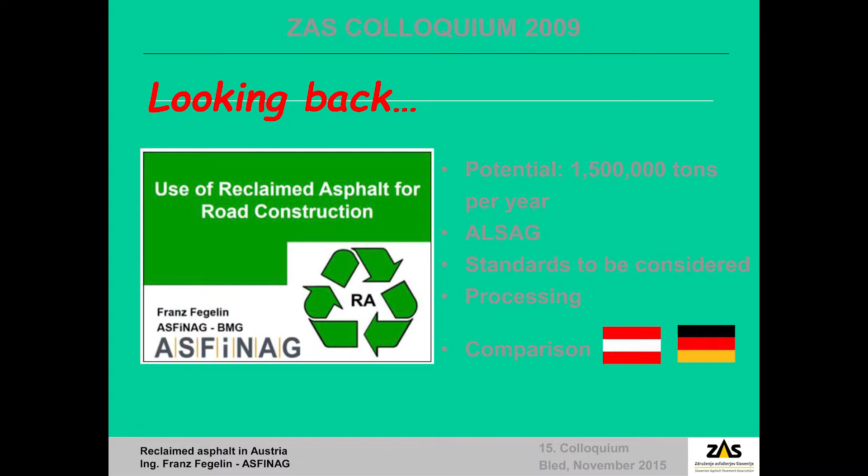What was the situation? In Austria we had in 2009 a potential of about 1.5 million tons of asphalt. If we extrapolate from an estimated 3.5% of bitumen obtainable from recyclable material, and at that time a common price of 450 euro per ton, we would have a potential saving amounting to 24 million euro per year. In addition, in Austria we also have a tax, called Alsag, that had to be paid for depositing material in a landfill. This tax is about 9 euro per ton.

Before 2009, the Austrian standards and regulations only allowed a maximum percentage of up to 10% to be used, and only for lower load classes, so we couldn't use it on the high-speed roadway network. Moreover, the construction companies, and also we as the clients, had only very little experience, so most of us were very skeptical. At the same time, some countries with fewer material resources, such as the Netherlands or the northern part of Germany, were already producing asphalt mix containing high percentages of reclaimed asphalt, reaching 80%.

But over the last 6 years, many things have changed for the better. The standards have been properly adapted, and also the quality of bitumen and gravels. Several pilot projects have been carried out. The one done by Asfinag in Graz was trendsetting in Austria. On the basis of what was learned, both the service items and also the requirements have been developed. The market started to optimize the processing technology.

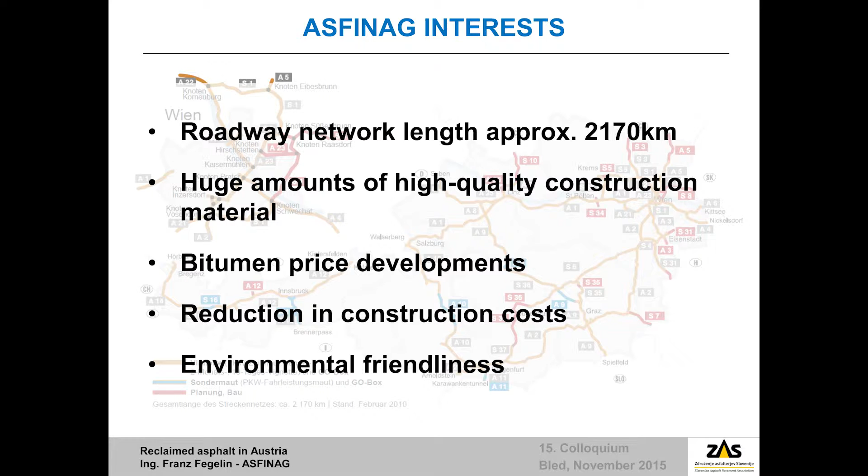The reason why we as Asfinag were so interested in the use of reclaimed asphalt is very easy to explain. This graphic shows our entire roadway network. The total length is about 2,200 kilometers, so we have a huge amount of construction material that can be reused. Bitumen prices are generally tending to increase rather than to fall. For this reason, potential savings are fairly significant, and we also have environmental benefits.

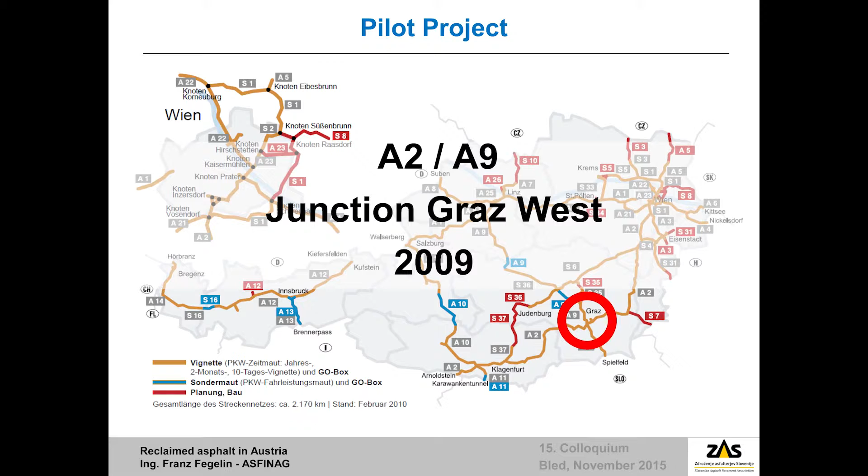As mentioned earlier, it was an Asfinag pilot project that gave direction to the development of the reuse of reclaimed asphalt for asphalt mixes. The project was carried out in 2009 in the area around Graz, in Styria, Austria. The section is part of the high traffic junction of the A9 and the A2.

On the overview map, you can see both ramps which were refurbished. Ramp G, you see it here in red, was made using traditional asphalt mix, so without reclaimed asphalt. Ramp E, which is marked here in yellow, was divided into 2 sections. One was made using 15% reclaimed asphalt for the binder courses and 20% for the base courses, and the other half was made using higher percentages, 20% in the binder courses and 30% in the base courses.

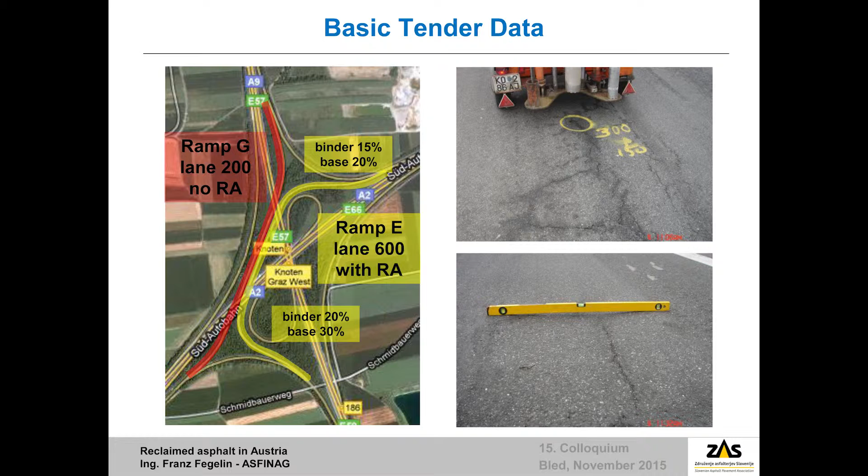In preparing the tender documents, preliminary research had to be carried out in order to know more about the required quality, because in this case we wanted to reuse the material from the same site. The evaluation of the tested sample cores showed which layers were usable and which not. The usability mainly depended on the quality of both the bitumen and stone, and especially on the percentage of round grain, which is very specific to the area in Styria and is not allowed in the Austrian standards.

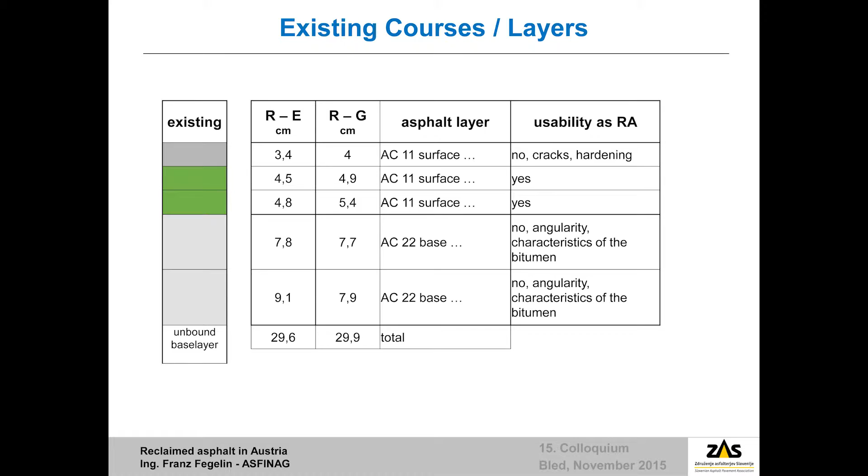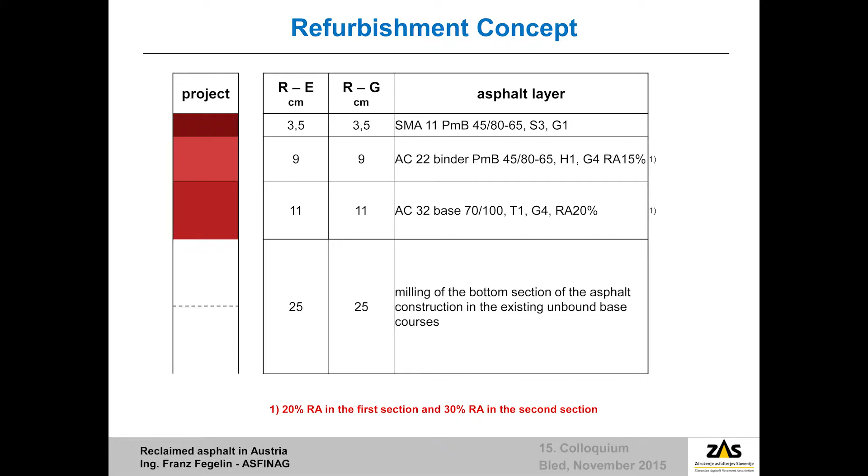As you can see, these ramps have been refurbished more than once, so we really had enough material to be reused. The layering design of the ramps was planned as shown in this table. To get the material, we milled layer by layer. The rest of the material we didn't need was processed and included into the unbound base courses in order to improve the quality.

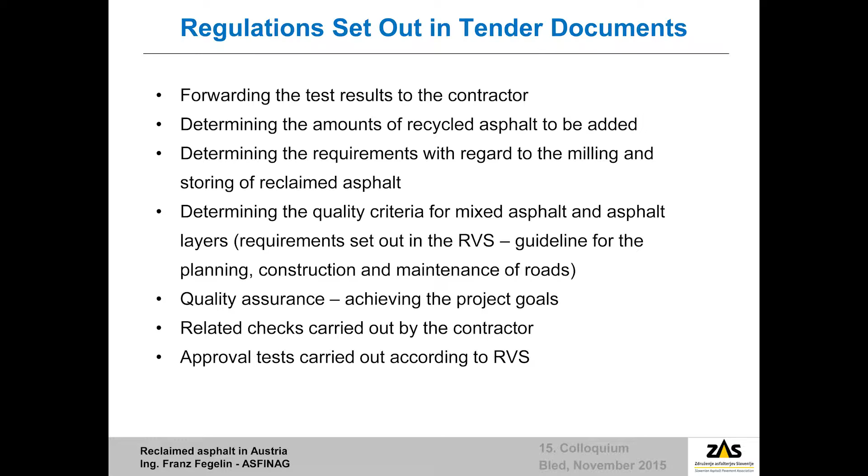Our next issue was which requirements and regulations were necessary for preparing our tender documents. First, all test results gained from the taking of sample cores were forwarded to the contractor, so it was possible to prepare the recipe for the asphalt mix and calculate the related costs. We regulated the amount of material to be reclaimed and the amount to be added, as well as the storage conditions. We fixed the project goals, the related checks, and set the quality criteria. Last but not least, we described the approval tests.

One important point to be determined in the tender document was the amount of recycling asphalt to be added, the related deviation allowed, and how we regulate the penalty payments. The deviation was determined by the conditions of processing technology. The check of the amount was done by batch scales, which were included in the conveyor belts. As we had higher costs for this pilot project, we couldn't risk ending up without findings for future projects. So that's why, in this case, our penalty payments were very high.

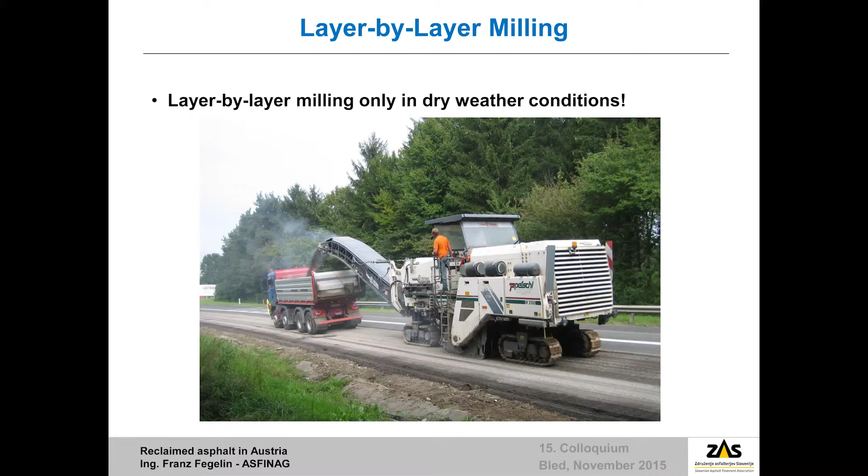As I told before, the first step is milling the raw material layer by layer as dry as possible. The depositing has to be carried out in such a way that each layer can be stored under covering in order to keep the water content as low as possible. Using this method, we got a water content not exceeding 3 to 5%, which is necessary for a good quality and also for the process in a mixing plant. Because with too high a water content, you would risk damages in the facilities because of explosions by steam.

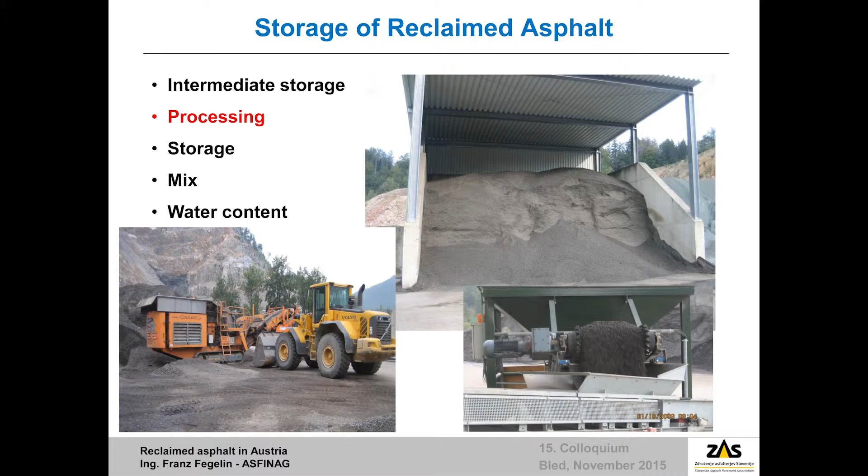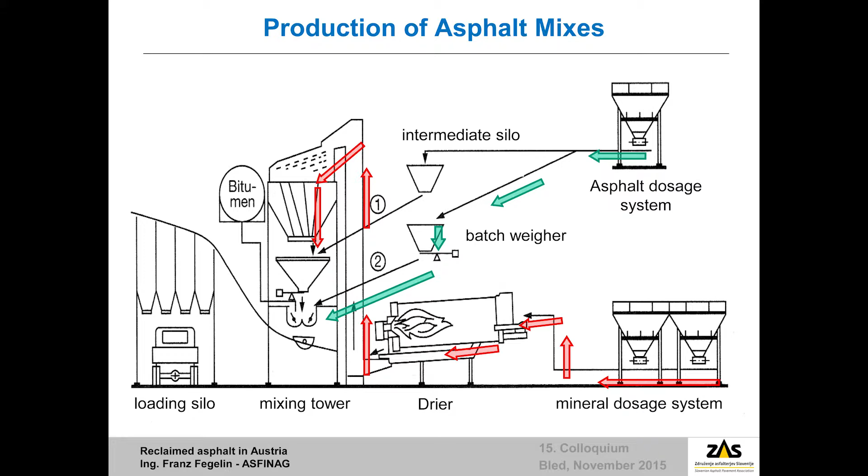In Austria, traditional mixing plants are set up with a combined system through which the asphalt mix aggregates are added. Mixing plants with parallel drums are rarely available. I think we have 3 at the moment in Austria. As there have been initiatives in order to promote the use of reclaimed asphalt, many facilities have been especially adapted for this purpose in the last 6 years.

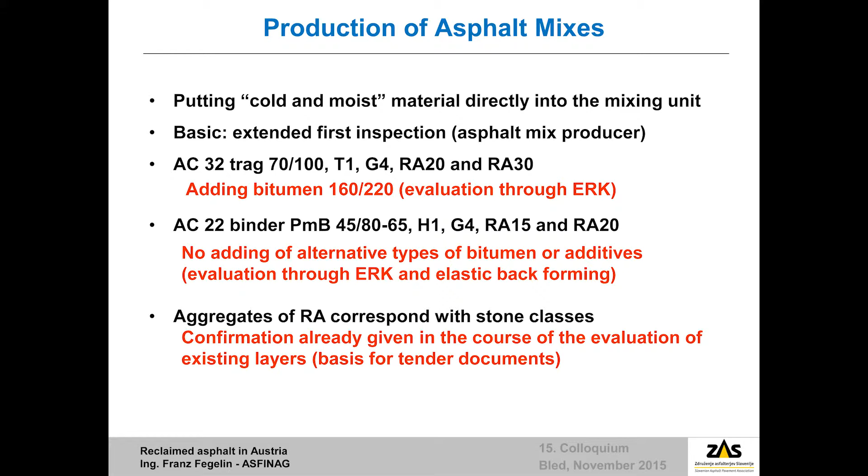The pilot project was adapted to the conditions set by the mixing facilities available in Austria. So we use material in a cold and moist condition. This regulation allowed for a large number of bidders to submit their offers. The first inspection was carried out by the producer. So the contractor chose, for reaching the quality in the base course, a soft bitumen. In the binder course, we didn't need any alternative types of bitumen or additives. The aggregate quality had been tested already in the course of the condition assessment, confirming its compliance with the set requirements.

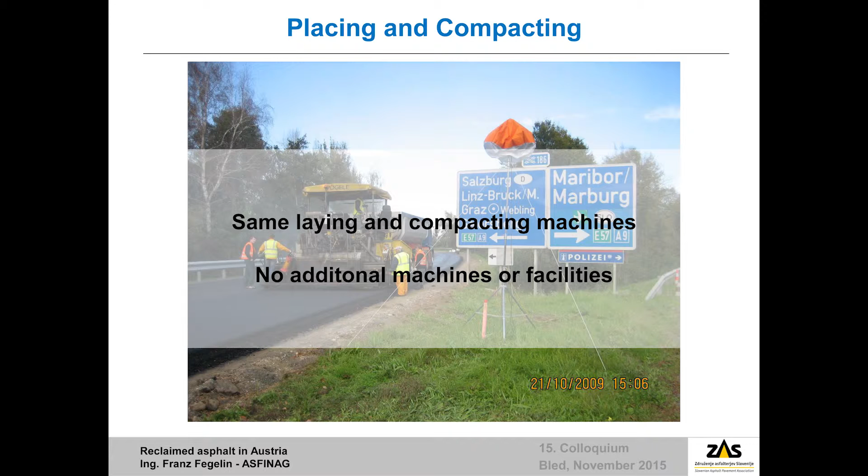For placing and compacting, there are no differences between material with or without reclaimed asphalt. As for the compacting, our personnel manning the machines reported that the time for carrying out the compacting was a little bit shorter in this case than with normal asphalt mix. This was confirmed by means of measurements carried out on the site.

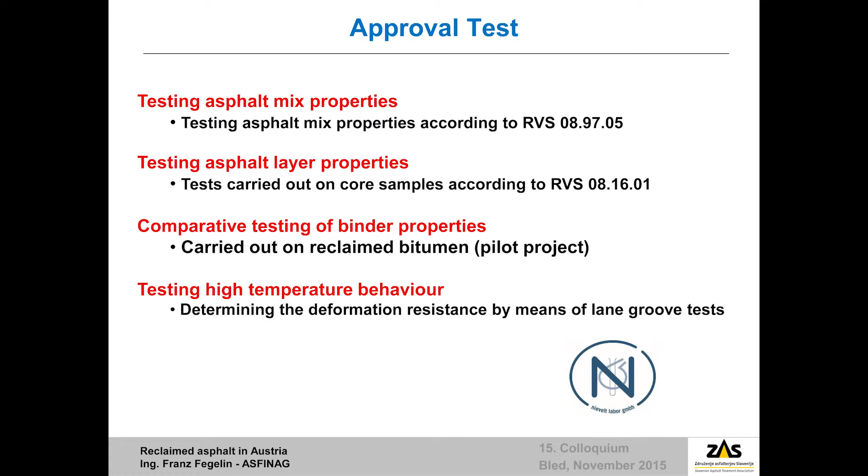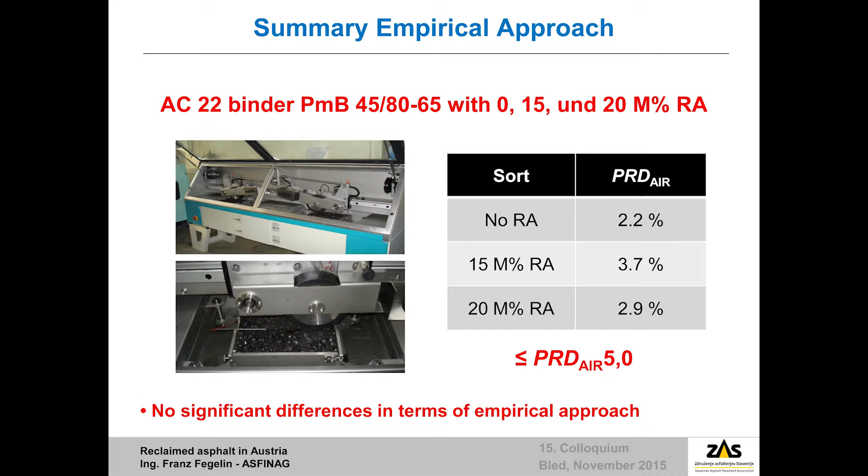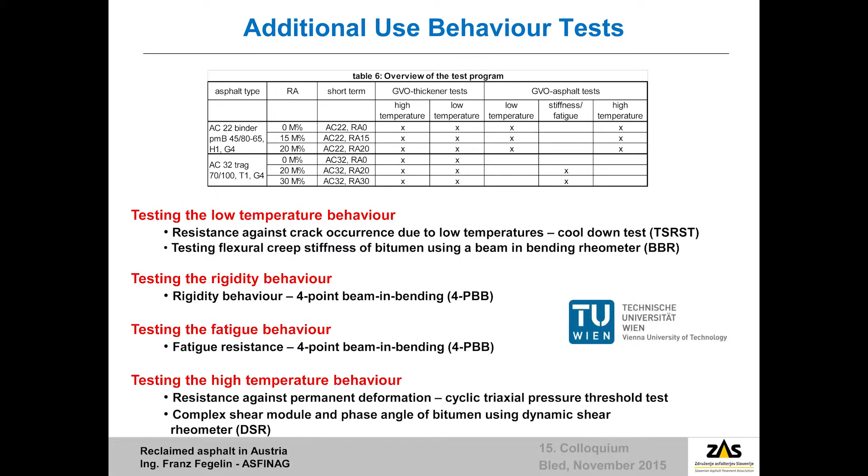The quality was checked, as it is for every normal refurbishment, according to the Austrian standards, by taking bitumen samples and sample cores. In the pilot project, we also examined the properties of binding agents in the reclaimed material. The deformation resistance was to be confirmed according to the Asfinag regulations by a wheel tracking test. Here you can see the results of this test. Summarizing the results, we can say that the quality of asphalt mix containing reclaimed asphalt did not differ from that with traditional asphalt mix. The limit value of 5 was not exceeded with all test types. In addition, the grip behavior was tested by means of the RoadSTAR test system used in Austria. All test types met the set requirements.

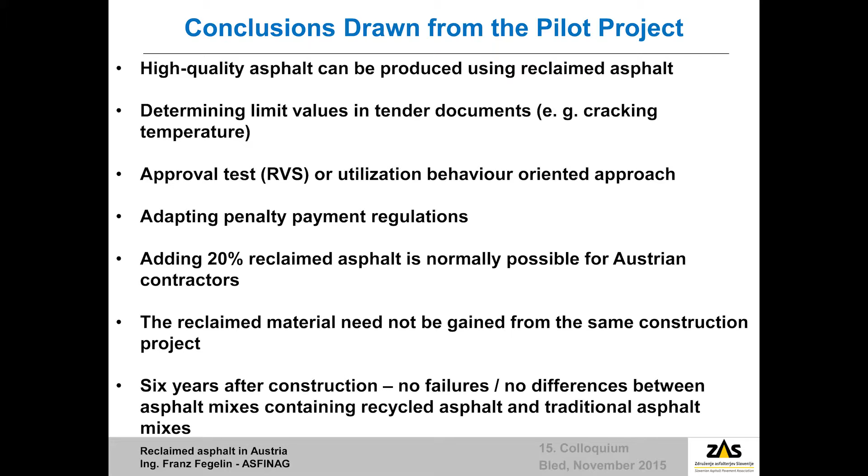In order to take the right decision in the future, we want to know how the behavior of the aggregates is in maybe 5 or 10 years. So for this reason, the Technical University of Vienna carried out a performance-based requirement test. The crucial parameters were the low temperature behavior, the rigidity and fatigue behavior, the high temperature behavior, and in particular the resistance against permanent deformation.

The results of this test show us that for the high temperature behavior there are no new findings. The result of the low temperature test shows clearly that one of the important characteristics, the failure temperature of minus 25 degrees Celsius, was reached in any case. Material with reclaimed asphalt was a little bit better than asphalt mix made with traditional aggregates. We think it's because the contractor chose a very soft bitumen. The crack and strain resistant behavior was also very good in all test samples.

So, after 6 years, we can say there's no difference between the section constructed using traditional asphalt and the section made using asphalt mix containing reclaimed asphalt. The set limit value for the low temperature behavior is a quality-related parameter that has to be achieved. Tests can be carried out according to the traditional regulations. If necessary, performance-based requirement tests can be carried out. Penalty payment regulations have been adapted.

For mixing plants in Austria, 20% reclaimed asphalt in asphalt mix is normally possible, and we think 30% is at the moment the limit. In addition, the adding of reclaimed asphalt is legally allowed, and the material need not be gained from the same construction project. And this is a huge benefit because we have more time. As mentioned before, the regulations and rules have been adapted. Now in theory in Austria it's possible to add up to 100% reclaimed asphalt. In addition, a code of practice for the reuse of reclaimed asphalt has been issued.